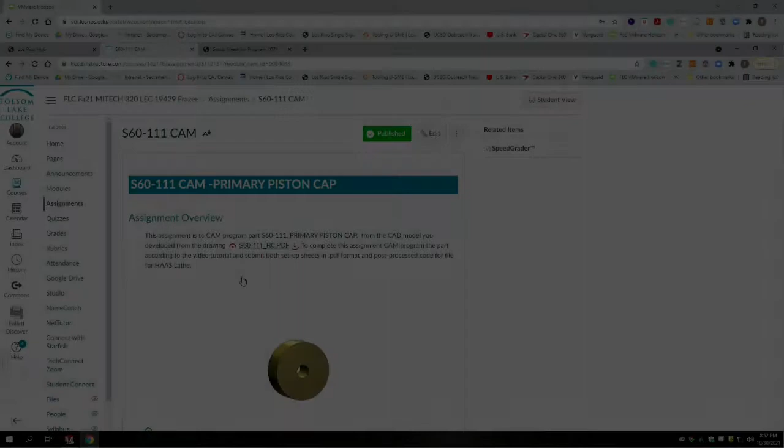Okay, everybody, this is Todd Frazee again, and this is the S60-111 CAM tutorial for the primary piston cap. Alright, so this is a disc shape. It's going to be similar to the last one. You probably use less tools because the tolerance on the hole isn't all that great.

So let's go to SolidWorks. Here's our model, and we're going to, again, go to the CAM tab on the main menus. Then we're going to shift over on the feature trees all the way to the right to the last one, which has an end mill pointing down. And we're going to create a job. Okay, and this job is going to be turning, mill turn.

And it's the S60-111 turn, not turny, complete. And that'll put it in the job notes so you know there's just one program. Okay, your model should be auto-selected. Instead of a rectangular box, we're going to go with cylindrical.

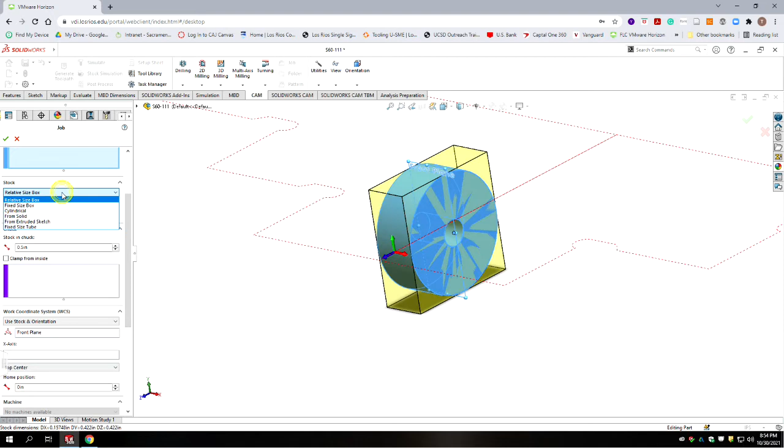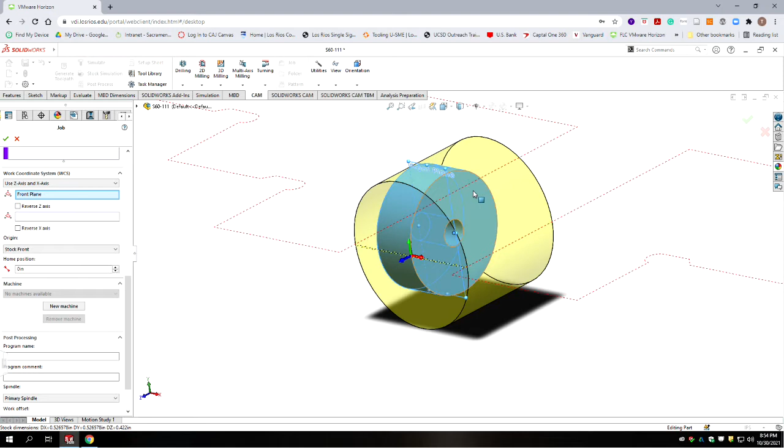Okay, and we notice our cylinders point the wrong way. So before we set anything else, we're going to go down here to stock orientation. And we're going to use Z and X axis. And then instead of having the front plane selected, we're going to select the front of our part. That should orientate our hidden lines of the chuck and our material in the correct orientation. I wish they put this in order before you started setting the extra stock, but we're scrolling back up to do that.

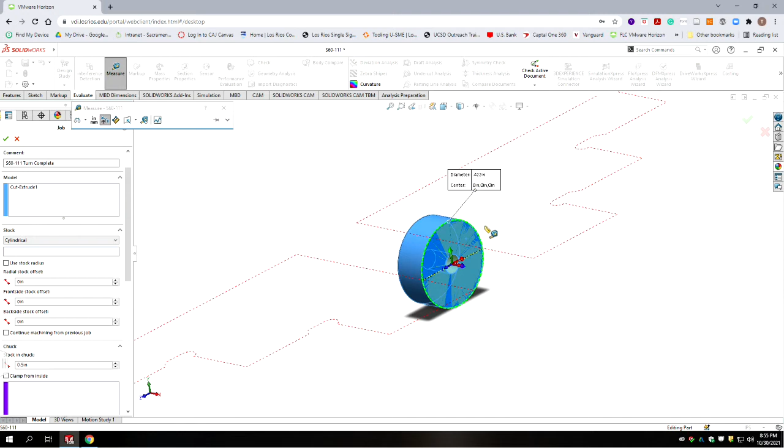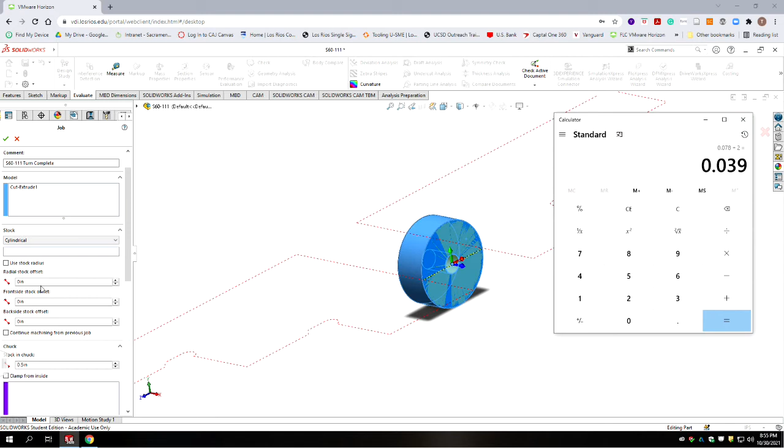We need to determine what stock size we're going to use. So if we go to evaluate, measure, and we pick on the outside rim, it's 422 thousandths. So we're going to cut this out of 1/2 inch material. So if I were to go to my calculator, 0.5 minus 0.422 is 78 thousandths. We're going to divide that by 2 because we're putting it as a radial number. And it's 39 thousandths. So we go back to SolidWorks, and radial stock offset is 0.039.

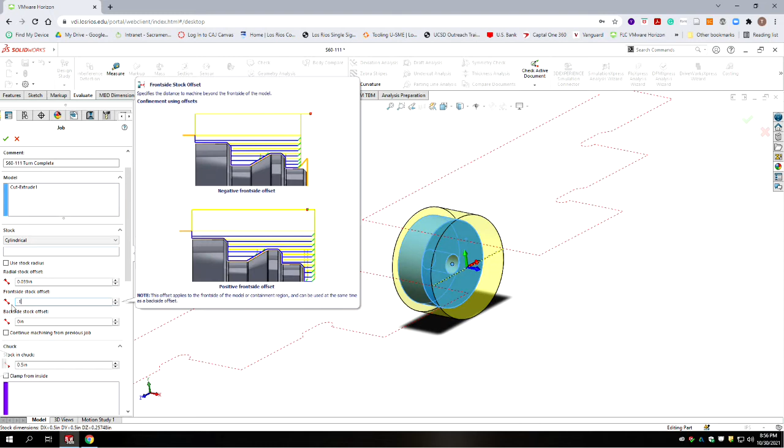Okay, and so that's how much material the yellow represents. We're starting with a thicker piece. Okay, the front side offset, we're going to put a little bit on there. So let's put 0.010, 10 thousandths extra material on the face. Okay, and then on the back side, we're going to put 2 inches. So it's a 2-inch long bar minimum. You could have a longer one, but that's minimum.

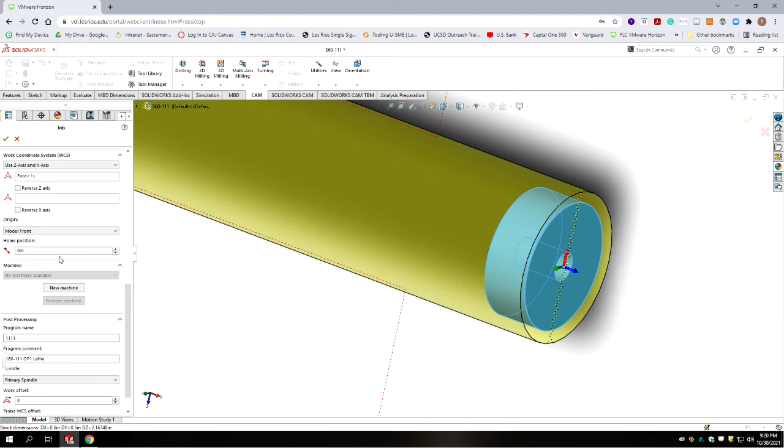And the stock that's within the chuck, we're going to do the same as we did last time. 1.6 inches are inside the chuck. The rest is exposed, so you got to be careful with collision detection so you're not running into the chuck. Okay, we're not clamping from inside, so we're going to leave that alone. So we're going to change our origin from stock front to the actual model front, which compensates for the extra material we have. So when we've machined with the facing cutter on the face of this, we've qualified the length.

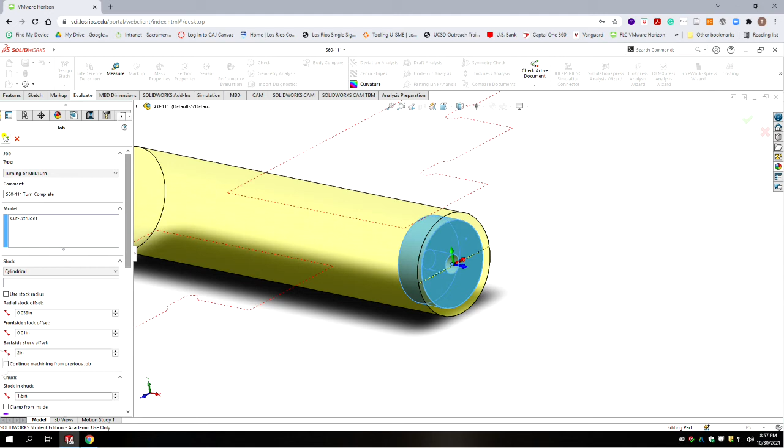Roll down, we're going to go to a program name, and we're going to call this 1111. Okay, so it's the first program for the 111 part. Program comment is S60-111 op 1 for the lathe. So we've identified what type of program this is for the operator. Alright, so we should be able to accept all that information now. And if we select on the job, we should have this material.

Okay. Now in the job, let's change the job name. Let's rename it. And it's also going to be the S60-111 op 1 for the lathe. Okay, so when we have multiple programs, we'll have them segregated by operation and machine type.

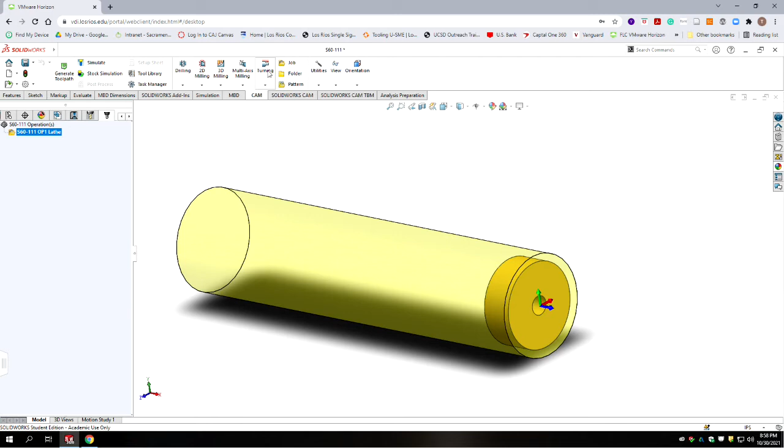All right, so we're gonna do something similar to what we did last time. So we started off with a 2D turning, and we did a turning face, and we're gonna select from our library tool number 1, our grooving tool. It's a cutoff tool and facing tool. Select that, and we can see a representation of it. Okay, we're going to leave all this at default.

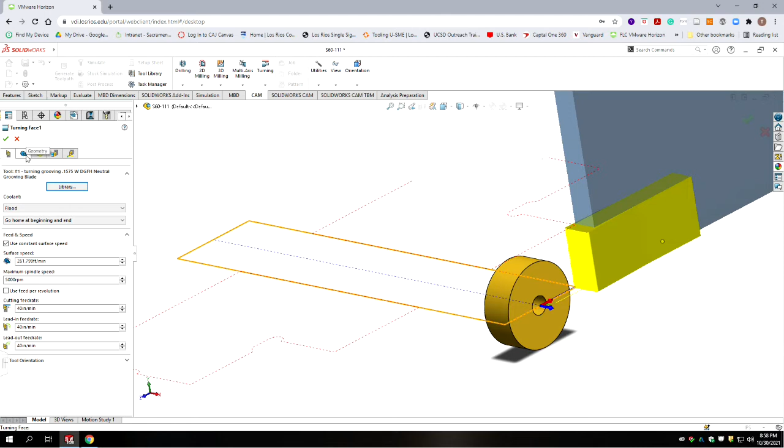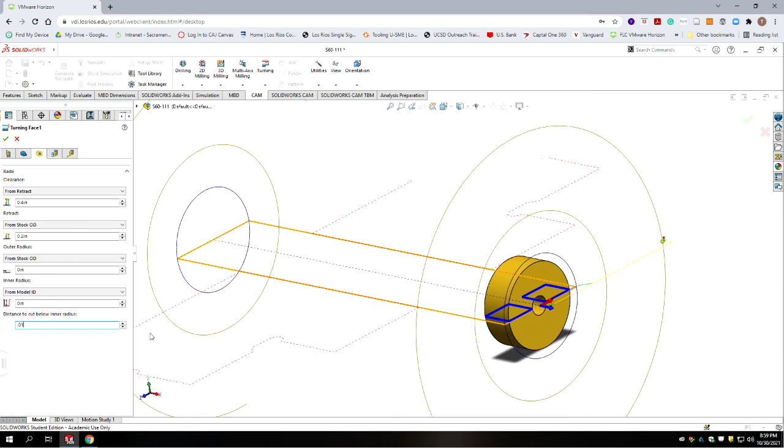Geometry, we can pretty much leave that at default. Our planes, we're going to leave the first 2 at default. And our outer radius is from the stock outside diameter, and we're going to go to the model inside diameter, okay, which is the smallest diameter on it. And then we're going to go a little bit farther, so I'm going to go 0.01, 10 thousandths. I can't remember if that was what we did on the last one, but we're going to go to the next stage.

We're going to leave everything at default except we're going to go to wear for compensation control. And on this last page, all we're going to do is change the angles of our approach. For this type of cutter, you don't want to come in at a 45. Okay, so we're going to come in at 0. No, we're going to come in at 90. And then our lead out is not the same. We're going to come out at 0. And we're going to leave the default 0.08 for our lead in, lead out. We'll hit accept.

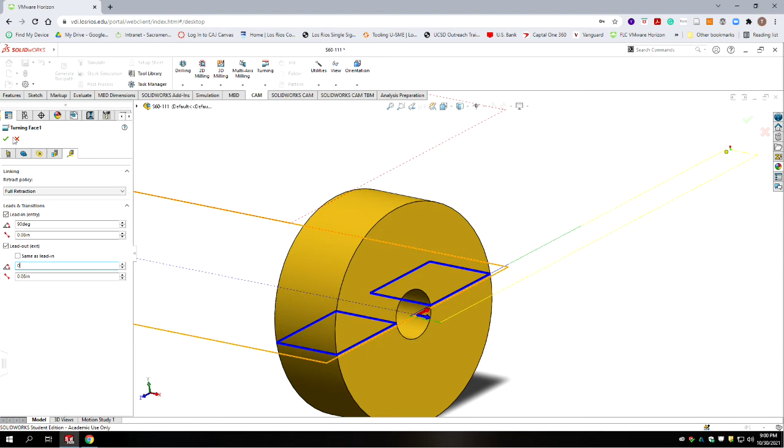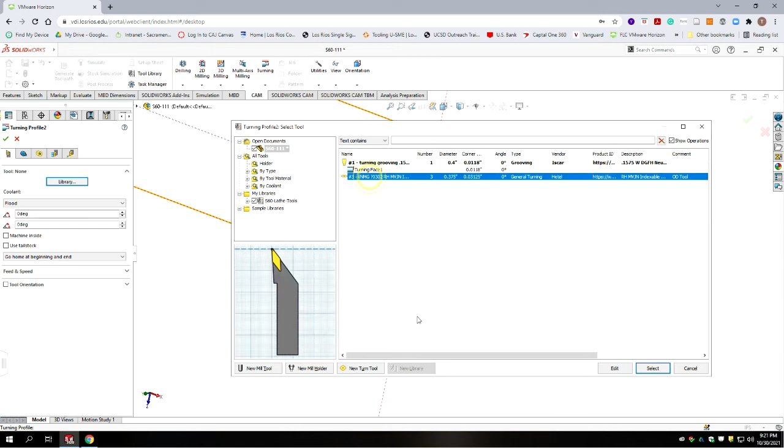Okay, so this is quite a bit bigger in diameter part than some of them. Okay, so we've done our turning face. Now we need to turn the exterior to take it down to size. You go to turning. We're going to use a turning profile tool. We're going to select tool number 3 from our library. Okay, it's a diamond shaped insert. We're going to leave all this stuff at default.

We're going to go to our geometry, and we're going to use a confinement, and we're going to go past by the width that would cover a cutting tool for the parting tool, which is 150 thousandths. We're going to extend our cut by 0.18 to make sure that we're going past. Now we're going to go on the next tab, and we're going to go from retracts fine. Our stock OD will be the retract clearance. Our outer radius is going to be from the stock, and then we're going to go to the model outside diameter. We're not going all the way through the part, so we're just turning down the outside.

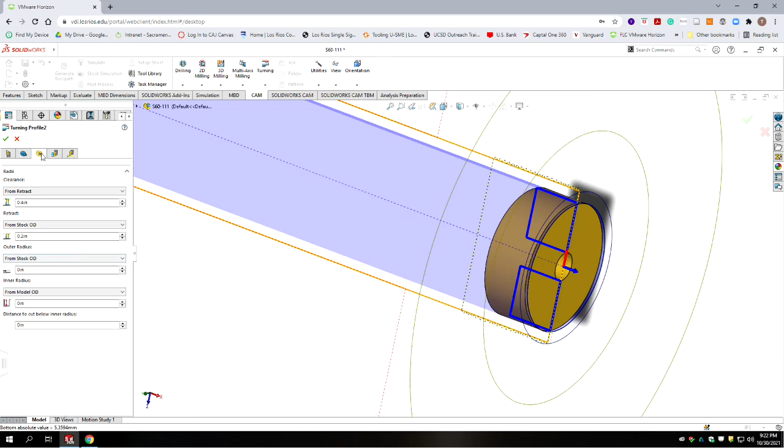And then we're going to switch over to the next tab, which we're going to leave everything at default, except for we're going to take away roughing passes. I don't think we need them on this. And we're going to change our compensation to wear. And then we're going to move on to the next tab. And we're going to set this allow radial and axial grooving. We're going to set that to not allow grooving for what we're doing. And then we're going to go to the next tab.

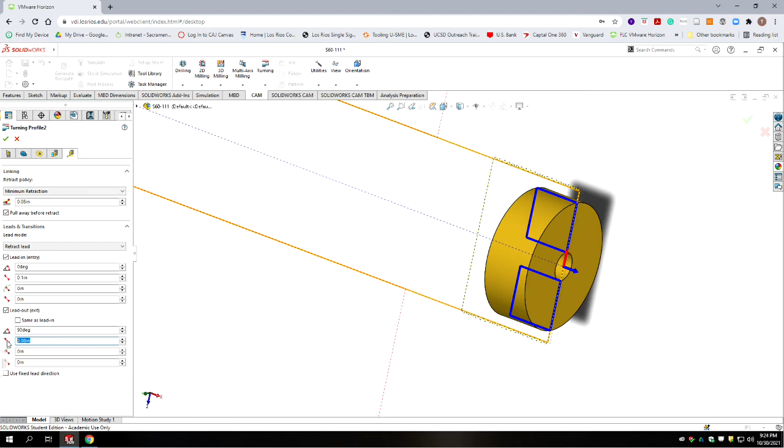We're going to leave that at 80 thousandths. We're going to change this to 0.1 as a lead in. And we're going to go at 0 degrees. We're going to have a lead out, but it's not going to be the same. We're going to lead out at 90 degrees. And we're going to deselect this pull away before retract. And what that will do is give us a feed out to feed off the part on this little flat edge here.

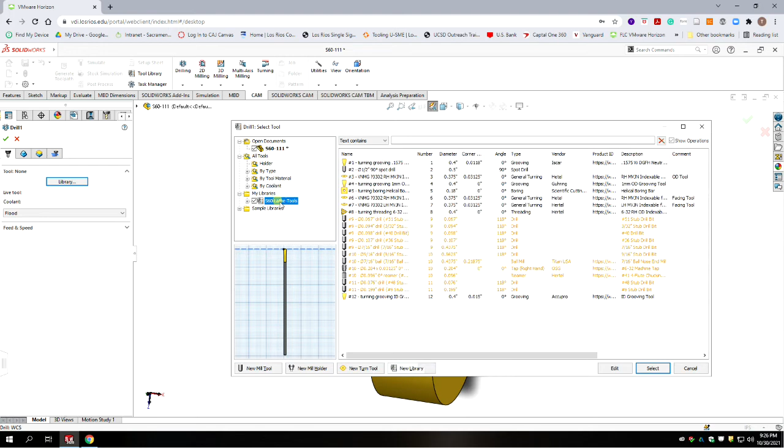Okay, so let's go on to the next operation, which is the spot drill this hole. So we're going to go to drilling, we're going to use the standard drill command. We're going to go to our library, and we're going to go to our lathe tool library, and we're going to select our 1/2 inch spot drill. We're going to select that drill bit. Okay, we're going to leave the first page at default. We're going to go to the second page.

We're going to select the hole we're drilling. Start in the center there. Okay, we're going to skip to the next edge, and now again it's like a mill. It's treating the face of this part as if it's the top in reference to the cutter. Okay, so we're going to leave 0.4, we're going to leave 0.2, but it's going to be from the model top, not the stock top.

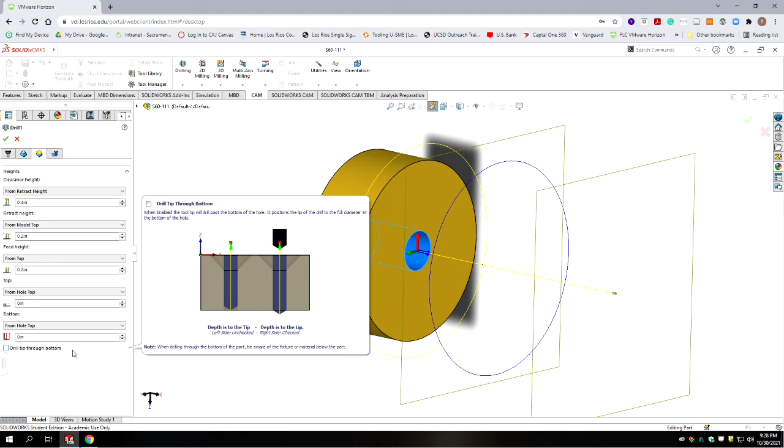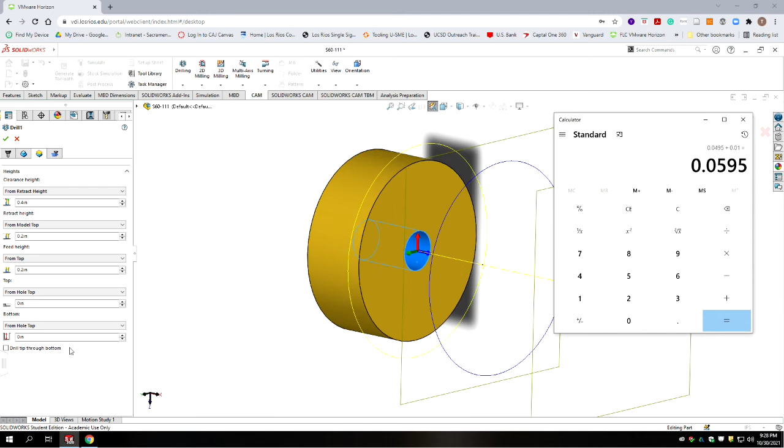And our drilled hole is going to go from the top of the hole, but our bottom is also going to be the top of the hole, because we're going to put in a punched in value here. It's 94 to 99 thousandths. So if we take 1/2 of 99 thousandths, divided by 2, and if we add 10 thousandths, we get 59 and 5/10 thousandths. So if we put that in here, negative 0.0595, we will get a slight 5 thousandths chamfer all the way around that hole. It'll help the lead in for anything that goes in there.

Okay, we're going to go to the next tab, and we're going to do just a standard drilling cycle. So it goes in, drills to a depth, and then pulls back. We're going to accept that, and then here we've got our little countersink from our spot drill. So we're going to change the name of this to spot drill, and we're going to go on to the next operation.

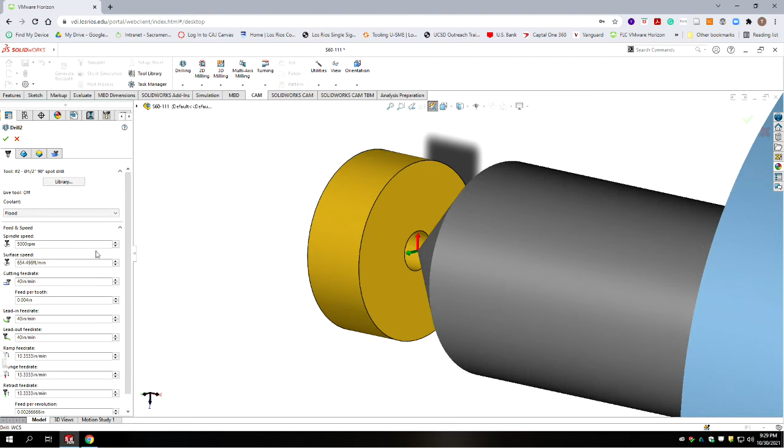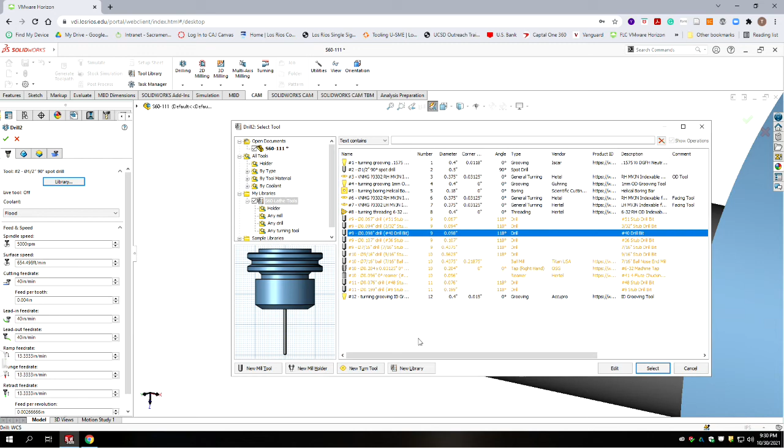So it's another drilling operation. We're going to select from our library the same tool we selected for that. So we have a 99 thousandths top end hole with 94. So I would say that we're going to use this 98 thousandths drill bit, which we'll have in position number 9. And we'll leave all those settings at default.

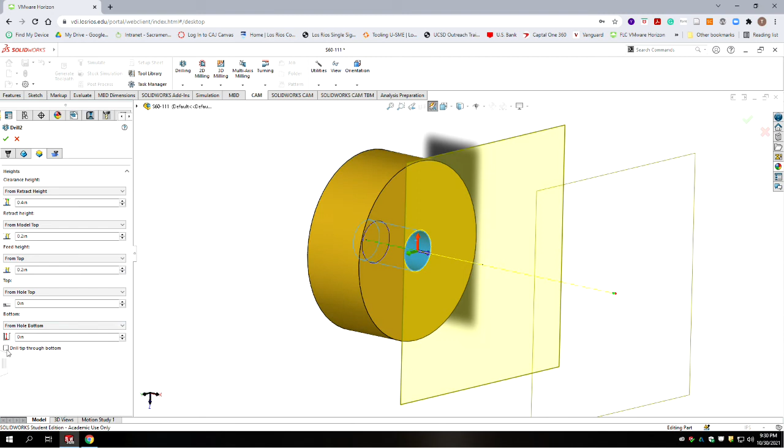We're going to drill this hole here. Okay, so we selected it. We're going to our planes. Our retract height is going to be model top. And then we're going from the hole top all the way to the bottom. But we want the tip of the drill to go all the way through, and we want a little bit of extra margin. So we're actually going to go 0.180, which is the same amount that we machined off on the outside. So our parting tool will come through and cut right through that diameter to release the part, so we don't have to go all the way to the center line.

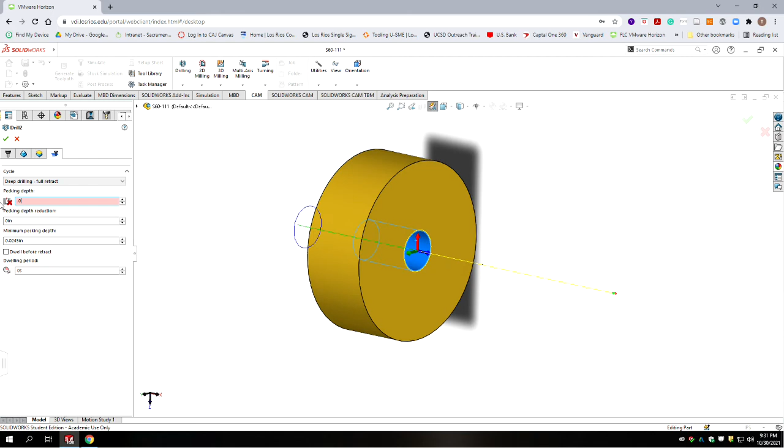And then our next step, we're going to do what's called a deep drilling cycle, because this is a soft material. And we're going to do a peck depth of 40 thousandths. We're going to call that good. Okay, so now we've drilled our hole through this part. Now the next and final step on this one is to part the back of the part off.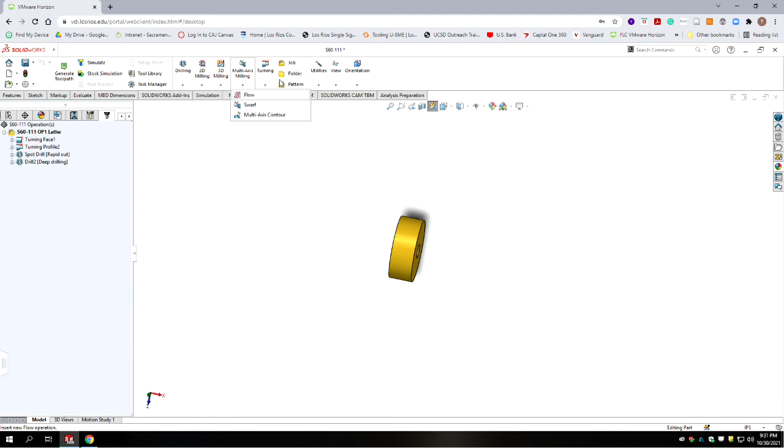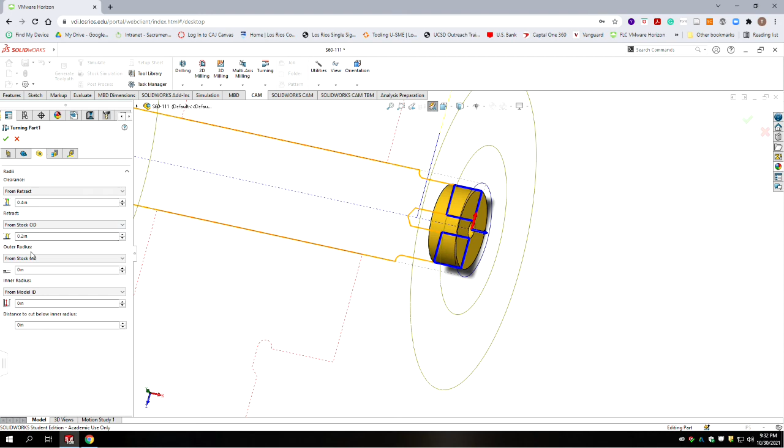Okay, so we're going to go to turning, and we're going to do a turning part. We're going to go back and select tool number 1, which is our grooving cutting tool. Okay, and flood coolant. Go to geometry. We've already got it selected. We've got all our numbers here. We're going to change the outer radius to our model OD.

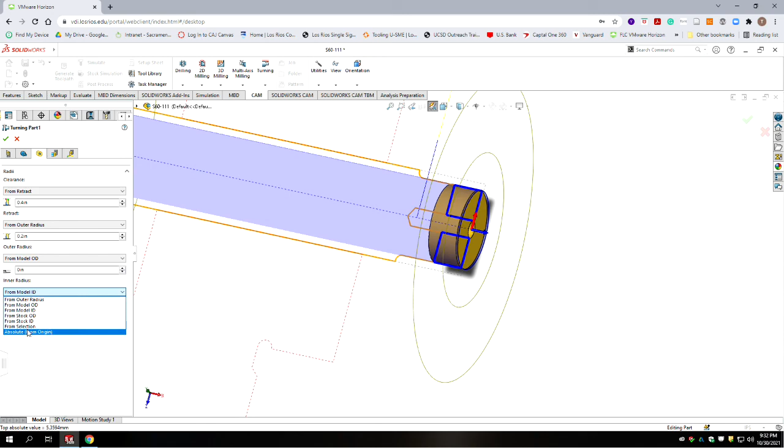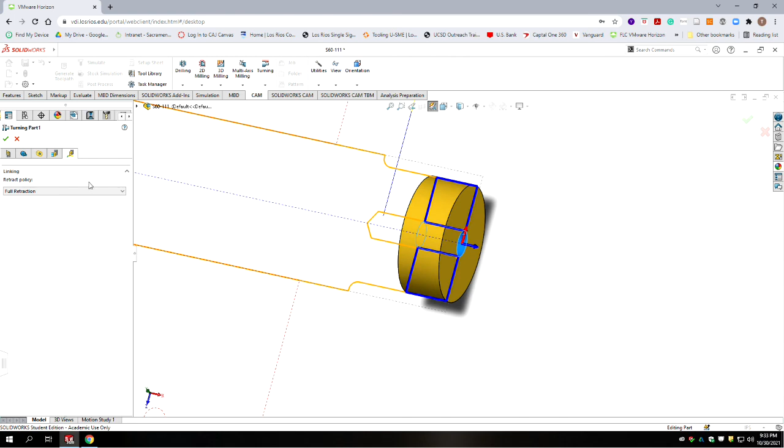And then we're going to go not from model ID, but we're going to select a feature, which is going to be the hole. So we don't need to go all the way through. We just need to go down to a little bit past that diameter. And we're going to go a little bit past the diameter I just selected off that face by 0.01, 10 thousandths. And so that'll give us our feed in with the cutoff tool into the hole. Okay, we're going to move on to the next tab. We're going to leave everything at default. Go into the last tab. We're going to do full retraction and accept.

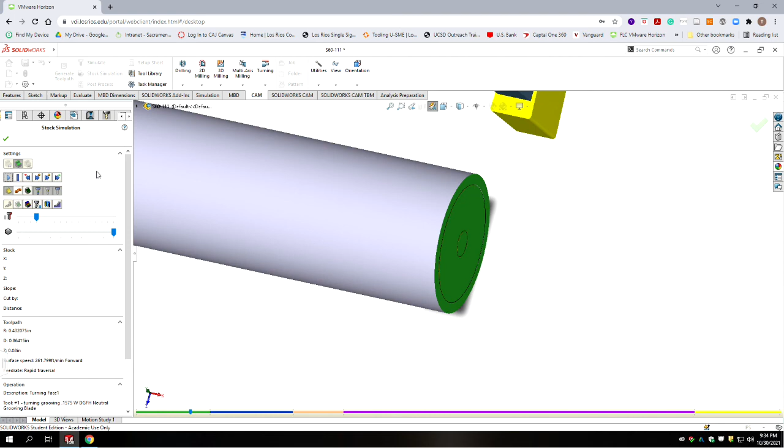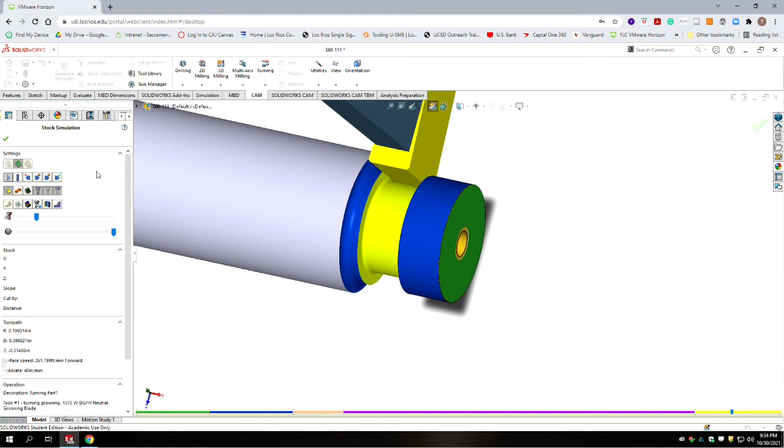Alright, so now we're done with the programming for the second part in our series for the lathe, for the S60-111. Now let's simulate and see what we did. Stock simulation. Okay, let's play. So we come in with a grooving tool, face it, go around the outside. Now we're doing our peck drilling. Now we do our parting, and then we're done. We're going to close the simulation.

Alright, so you should upload one file that's a setup sheet and one file that's an NC program for this project.